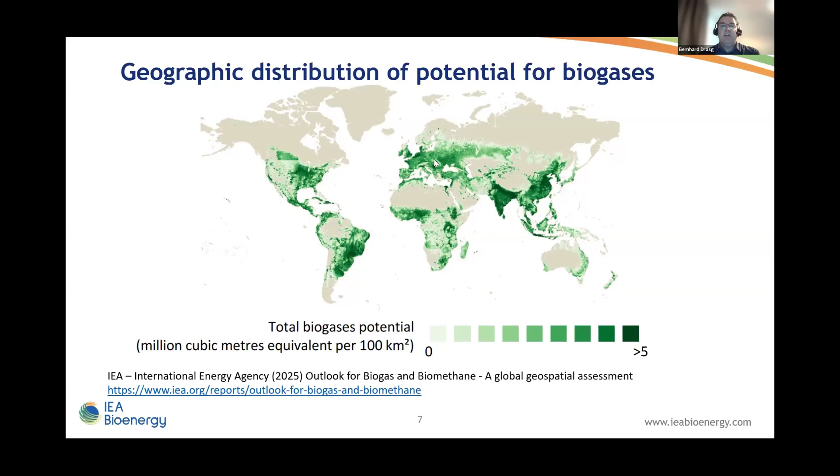I also would like to show a bit the geographical distribution of the biogas potential, also from the IEA report. You can see, for example, that in India or Southeast Asia there's a big potential, as well as South America, the US and Europe. So there are regions with a high potential of biogas.

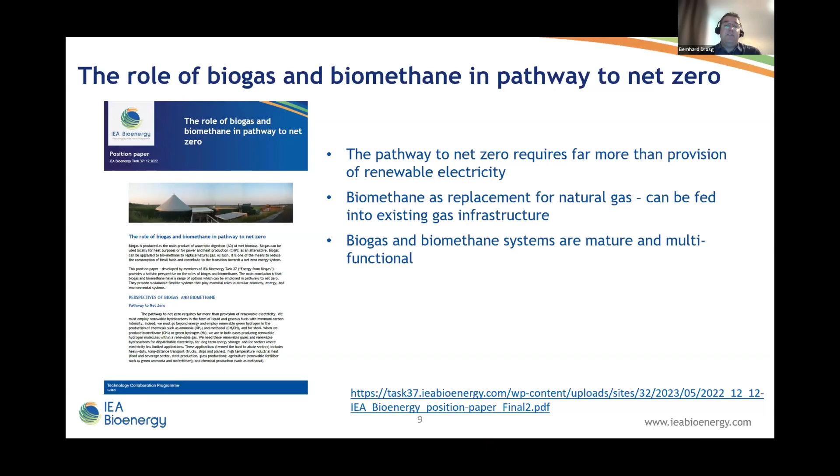We have published in the last 3 years a position paper called The Role of Biogas and Biomethane in Pathways to Net Zero, and I would like to highlight some main messages. It states that we require more than just renewable electricity, so bioenergy and biomethane will play a role if we want to reach net zero. Biomethane can replace natural gas. In my country, we have a strong gas infrastructure for fossil gas, and we can use this infrastructure for biomethane. Biogas and biomethane are mature and multifunctional technologies that can be deployed now.

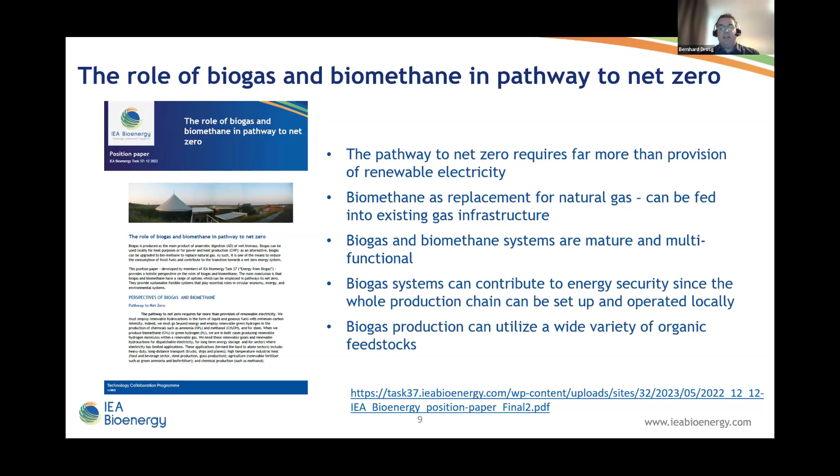We can also contribute with biogas systems to energy security, because often the whole production chain is operated and set up locally. Biogas can use a large variety of feedstocks, from manure to municipal solid waste to industrial byproducts, sludges, and so on. If we apply a biogas solution, we can reduce fugitive emissions from waste such as municipal solid waste or manure: the methane that would be emitted if manure is stored, we put in the biogas plant and reduce. We also have byproducts such as digestate and carbon dioxide, which are important to valorize. And with region-specific analysis of the availability, costs, and impact of specific feedstocks, we can ensure effective and sustainable biogas projects.

Biomethane is cheaper than green hydrogen and is also expected to remain so for some time in future. So definitely this is something worth to mention. And biogas and methane are sustainable and flexible systems that can be used in circular economy, energy, and environmental systems.

We just released one report, actually it's now for download since 2 weeks ago, about identifying and assessing sustainability effects associated with biogas solutions. You can find the citation. And the main message is that especially for planners, developers, and policymakers, it's important to understand the broad system effects of biogas solutions, and that they're together with waste management, energy and industry and agriculture. So it's a complex system. It's not like a monofunctional system.

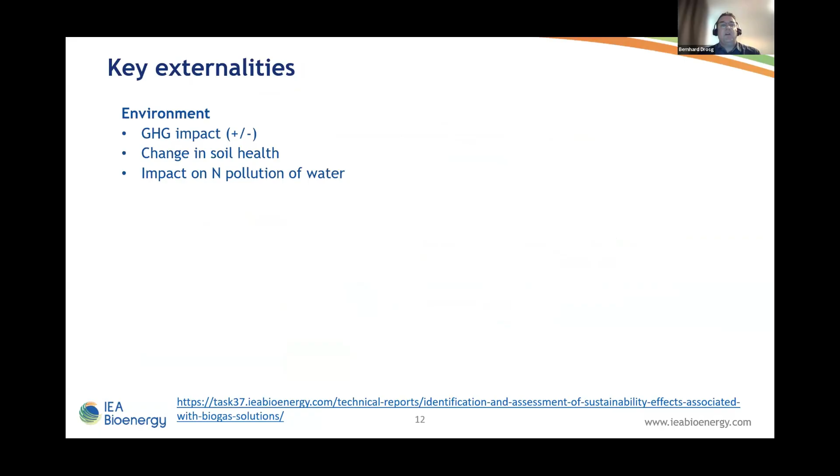Biogas can contribute to multiple sectors and sustainable goals, and it will require a great deal of cross-sectoral collaboration so that biogas can be more intensively deployed. I will just highlight some key externalities or co-benefits which are mentioned in the report. So biogas will have impact on greenhouse gas emissions, on soil health, and also on, for example, nitrogen pollution in water. It can have effect on economy and society.

So, for example, a topic of improving energy security, the cost of treating and processing wastes. We can use biogenic CO2. Often job creation in a rural area is something which is combined with biogas, and it can also contribute to resilience of agriculture. In agriculture, specifically to mention the reduction in use of synthetic fertilizer and also the impact of intermediate crops. With regard to energy, we can use existing gas infrastructure.

We can produce renewable energy, which is stable and storable, and we can contribute to energy transition and regional circular economies and eliminate fossil energy when we use the biogas instead of fossil gas. If you go to detail, there are like 53 sustainability effects highlighted in the report. You can look down in the link for the details.

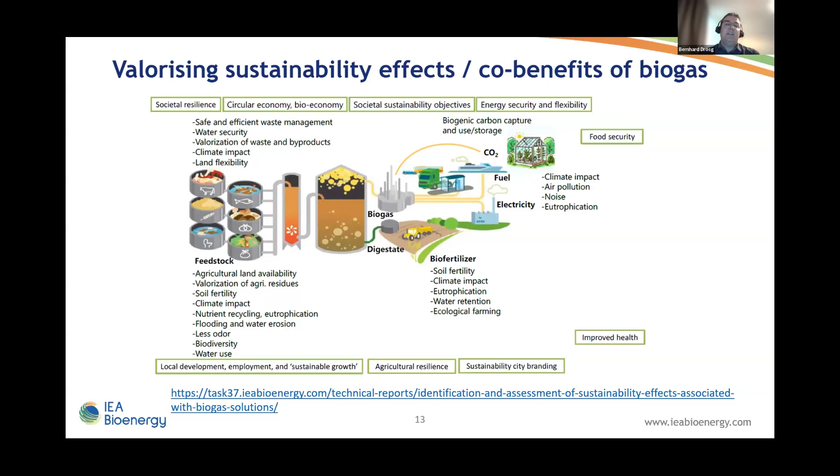So this is not something I want to go here in detail to show everything, but just maybe one interesting slide where you can see that for the biogas process, which is about feedstock, biogas, digestate, fertilizer, CO2, and energy, there is a broad range of effects and services to society which biogas can deal with. And there are also already intentions to see how we can monetize these effects so that the actors can also benefit economically from this. So yeah, don't want to go here into details. I have already given a summary, but just that you have seen also this overview.

So what can we do to promote? We can use scientific-based multi-criteria sustainability assessment. This is important, or we can recognize the cross-sectoral benefits of biogas solutions, which are in these different areas which are mentioned, from wastewater, agriculture, energy, and transport, and also in the industrial sectors. It is good to encourage a greater cross-sectoral collaboration. And also, if we think about policymakers and ministries, to have a shared decision-making and support that contribute to a circular economy in general.

And it should also have different sized solutions, and also valorize local communities. We should go more to integrated strategies that combine multiple renewable technologies to deliver desired functions while addressing urgent sustainability challenges. So this is something where biogas can play a role. And what else is to say? So it is important to harmonize the life cycle value chain perspective across relevant policies. So this is one message of the report.

And to enable biogas value chain actors to capture the full value of the contribution. As already mentioned, there are also some ideas how this sustainability effect can be monetized, and especially on the regulatory and administrative side, we should remove barriers and also restrictions on sustainable crop-based biogas and on long approval processes for technologies which are already mature.

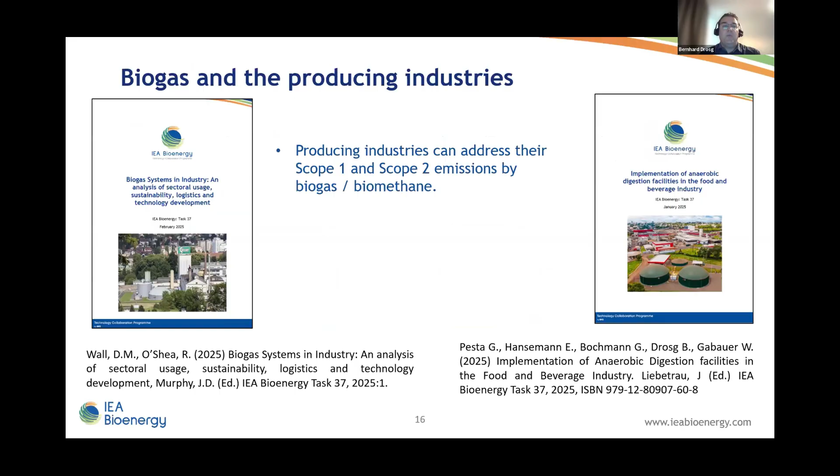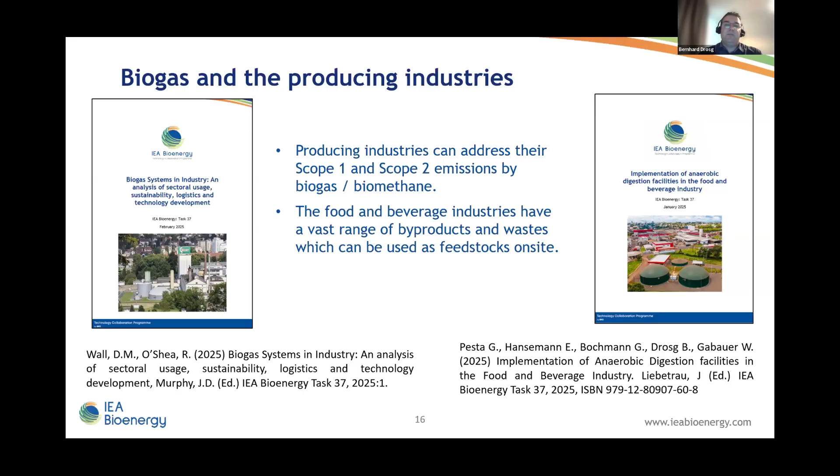And the second aspect is that especially food and beverage industries have a vast range of bioproducts, sludges, wastes, byproducts, and they can be used on site for biogas utilization. So then the logistics is also not so much the issue for the feedstock because it's already at the facilities.

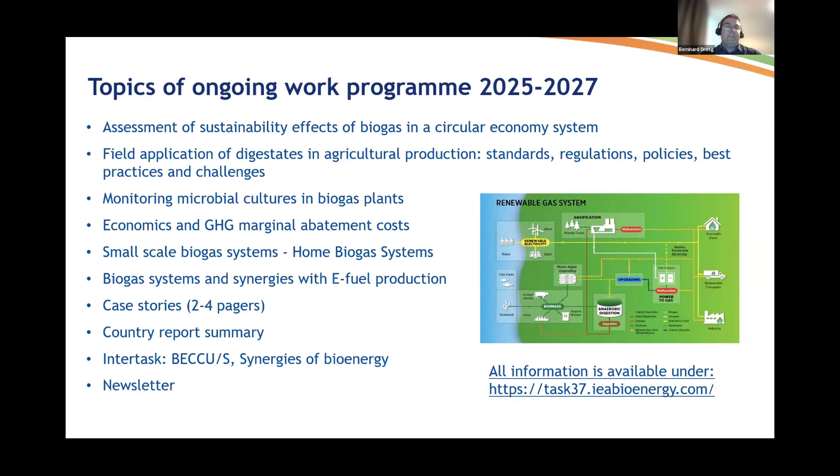So this was my presentation for today. I thank you for the attention.

Thank you, Mr. Drosg. It was definitely very insightful. I would also like to highlight that cross-sector collaboration, I agree, is extremely important. And sustainability assessments are another topic that GBA is also looking at. I would also like to bring to your attention a few biofuels marketplaces that have sprung up in India that we're aware of. Maybe you could also look at those. I'll avoid naming them, but there's a market coming up which could be looked at.

I would now like to invite Mr. Paul Greene, who is the principal of Greenetec LLC, a leading advisory firm in the renewable natural gas sector in the US. With over 30 years of experience in anaerobic digestion and biogas technologies, he's had key roles across EPC, across multiple companies. In 2010, he was one of the founding members of the American Biogas Council and served as its first elected chairman. Mr. Greene also holds a Bachelor of Science in Chemical Engineering. So, Mr. Greene, thank you for joining us. We're glad to have you. I will now leave the floor open to you.

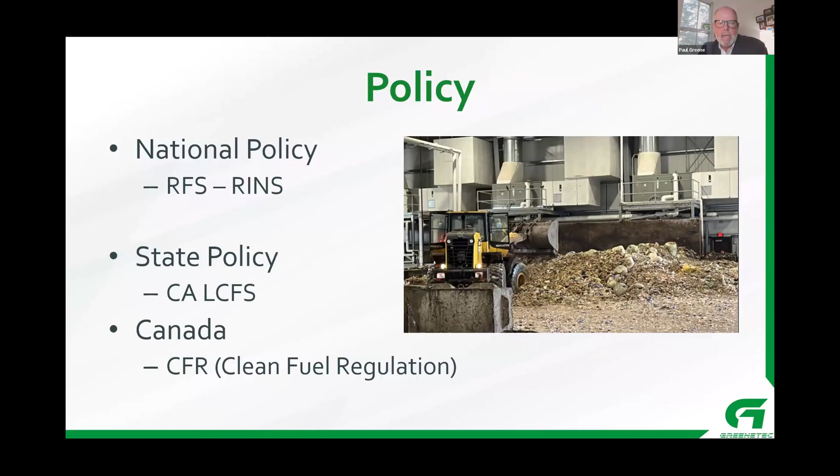Some policy in the United States ties to the RFS, the Renewable Fuel Standard. The currency of the RFS are RIN credits, RIN for Renewable Identification Numbers. In various states, California has a low carbon fuel standard that has been driving the US biogas market very passionately for the past five years, and the Canadian CFR.

As we speak, all eyes are on the upcoming 45Z production tax credit that is due to be put into law. The target is July 4th for the new budget, and we will know the rules for the 45Z production tax credit. Now we're building projects that have a 30% of project capital costs investment tax credit, which is fueling the industry currently.

Looking at new fuels such as aviation and maritime fuels is a very exciting opportunity in the United States. So back to the renewable fuel standard - there's several different types of these RIN credits. The most lucrative is called the D3 RIN for cellulosic biofuel.

You can earn about $33 per MMBTU for a D3 RIN credit, and you get those from dairy manures, landfill gas, and municipal sludge. D5 RINs, called advanced biofuel RINs, are trading at about $14 per MMBTU.

This big, beautiful bill, as our president likes to call it in the United States, is doing significant things in the biogas space. There's a hydrogen tax credit that is going to expire. Section 45Z is where the action is, and we're trying to figure out if negative CI scores will be allowed to incentivize that.

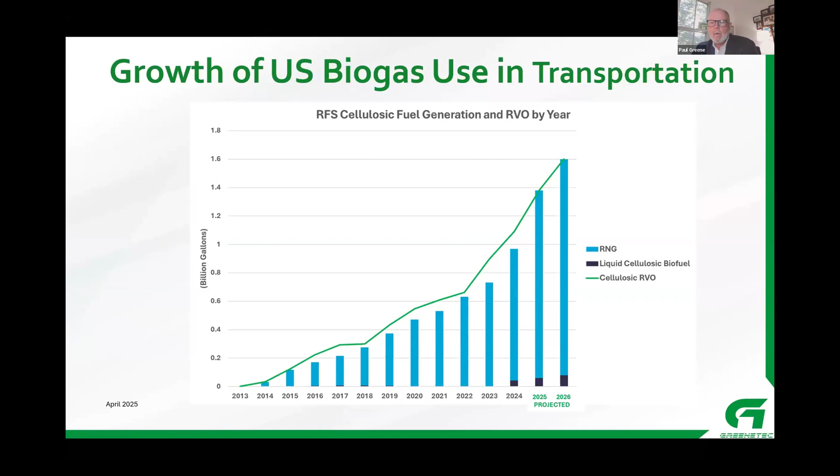This is a picture of the growth of US biogas use in transportation, and it shows of late the growth rate has been very robust, to the tune of about 1 billion to 1.6 billion gallons equivalent of transportation for the category of cellulosic fuels.

This shows the production of biogas from these projects. Landfills have most of the production. Agriculture has a large percentage of the production. Wastewater has a large piece of production, and food waste are the fourth largest.

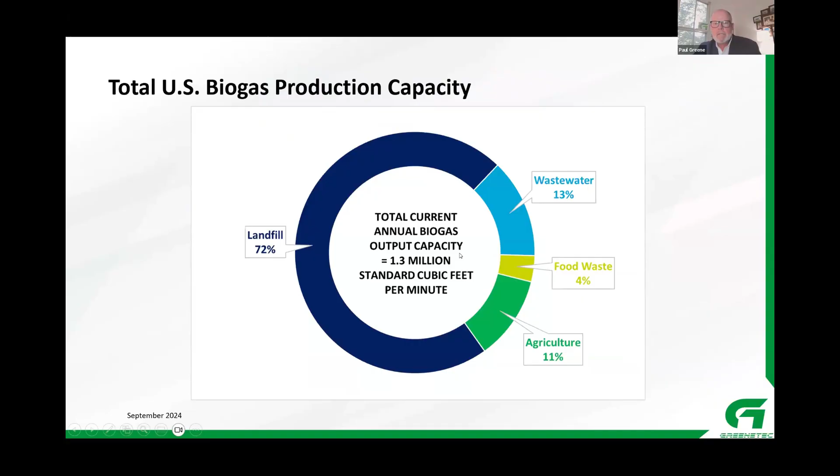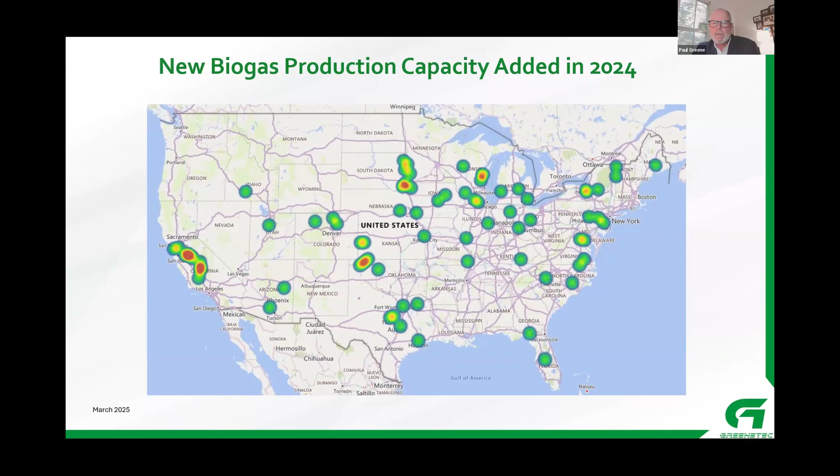In last year, this is where the new biogas production capacity was added in the United States.

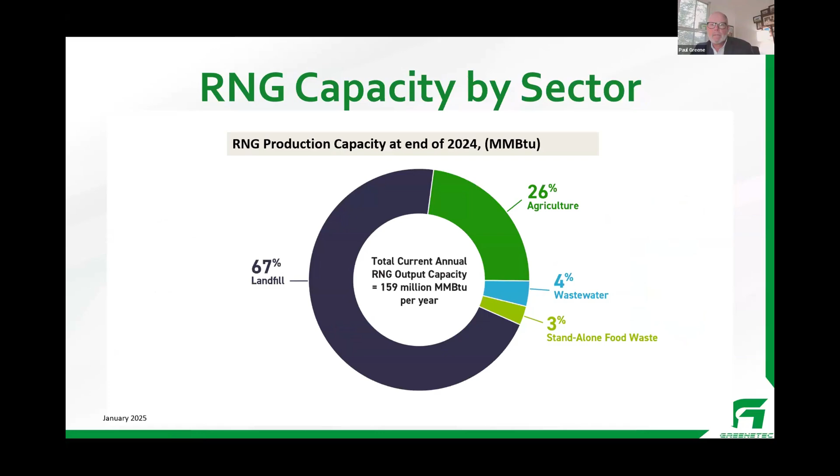More and more, we'll see crop residues being considered for feedstock. Things like wheat straw and corn stover are increasingly being considered.

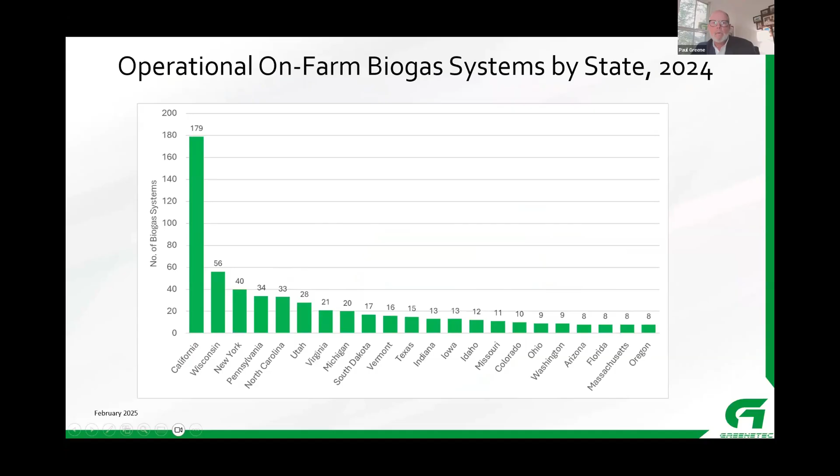This is the breakout by state of the different types of digesters. California is the leader. Wisconsin and New York and Pennsylvania follow. This is specifically for farm-based digesters.

The growth rate has been around 12 to 17% for farm-based projects in the United States. This is largely driven by the California Incentive Plan.

I'm going to fast forward here to some case studies to make up some time.

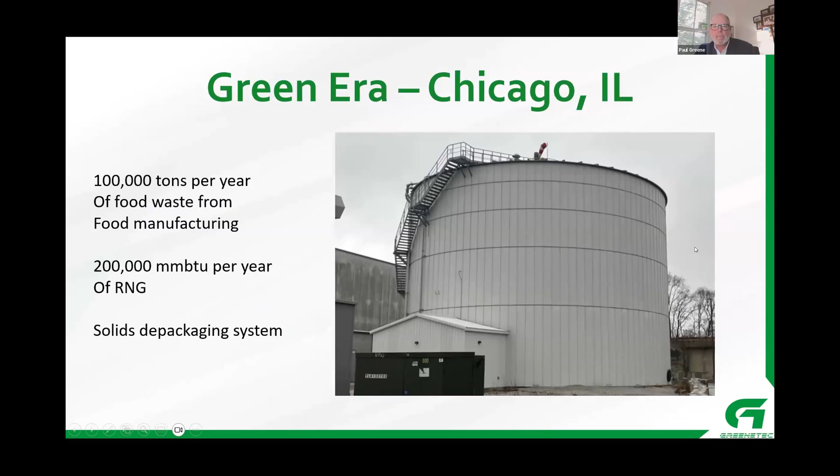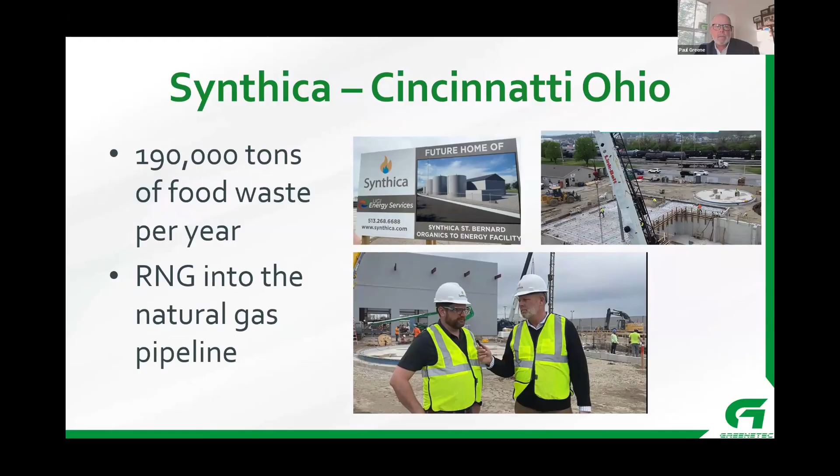In Ohio, in Cincinnati, this is a new food waste project that takes 190,000 tons of food waste and makes RNG for the pipeline.

In North Carolina, in the city of Warsaw, these are some food waste digesters that make RNG, about 45,000 cubic meters of digesters. This is a very large project, taking waste from processing of protein of hogs and chickens.

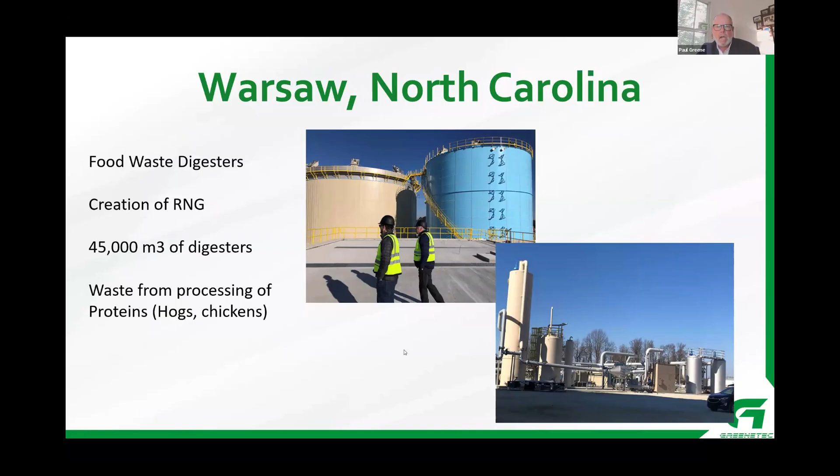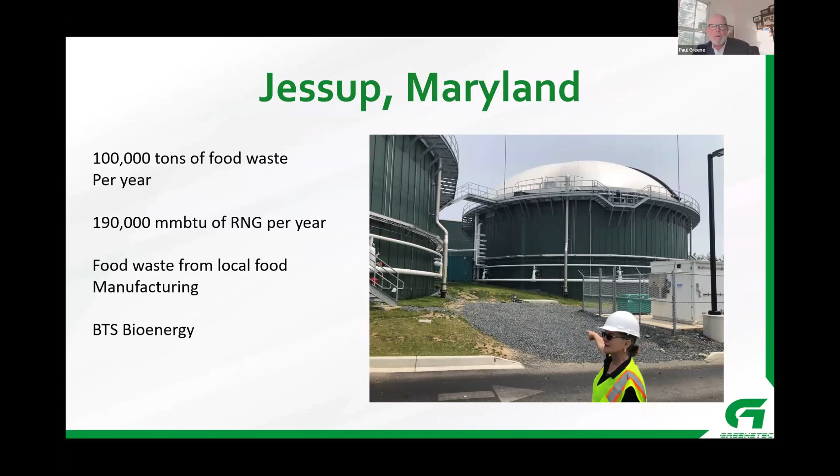In Maryland, in the city of Jessup, this is a food waste digester that processes 100,000 tons of food waste per year and makes 190,000 MMBTU of RNG per year, taking food waste from local manufacturing.

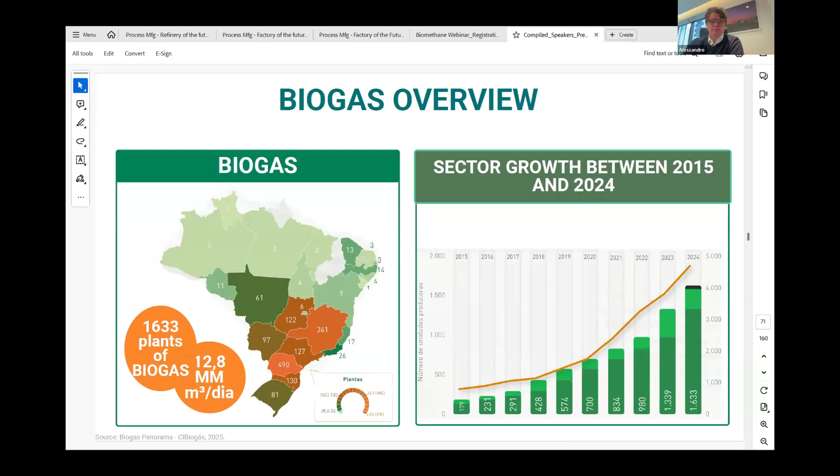So we have a big potential, especially in the sugarcane industry. Besides mud, that was said before, also bagasse and leaves, and of course urban solid waste, sewage, and animal protein is also important. So we see as a vision 35 million cubic meters per day in the next 5 to 6 years could be something achievable. The long-term theoretical potential for Brazil is 120 million cubic meters per day. So a huge potential. Half of this is sugarcane. So this has to be seen how it's going to be developed.

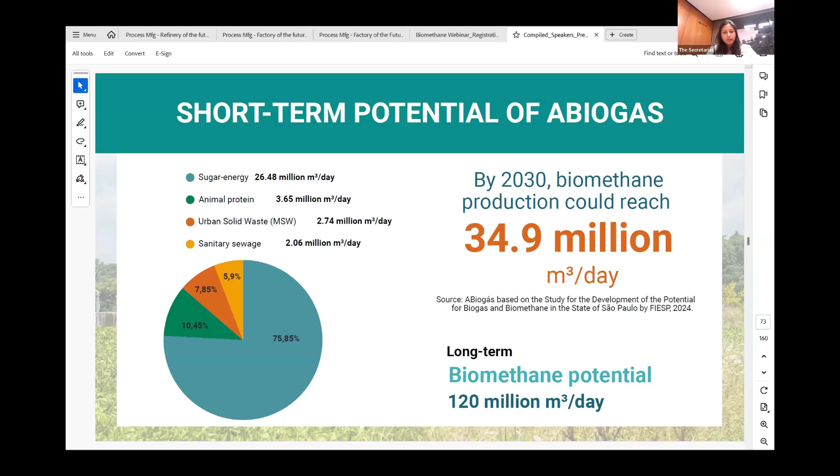So all this potential is only based on waste. We don't have energy crops considered here, especially sugarcane industry, agriculture, and animal. So this is more or less what we're planning to do. And we have a lot of projects going on now, especially for transport, trucking, based on biomethane. There's a big landfill project called Gas Verde in Rio that is mainly for biomethane used in fleets and also heavy and light vehicles. Please.

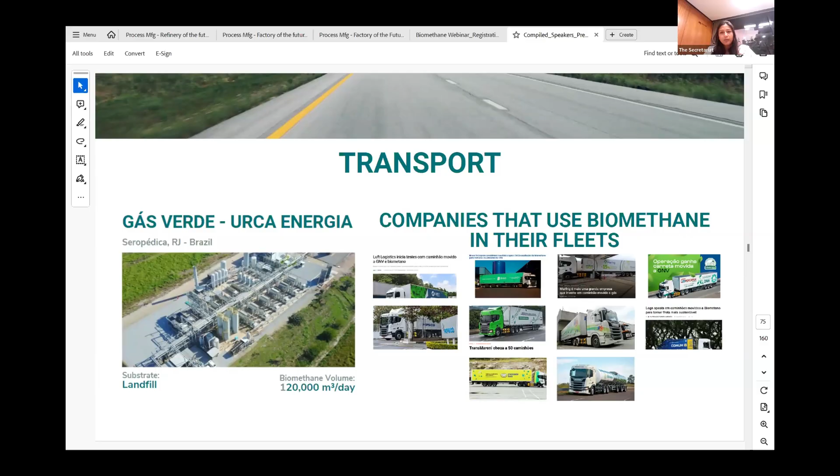And a lot of regulatory framework in place, especially a lot of different policies being set up, especially the Fuels of the Future law. If you can go to the next slide, please, we can talk a little bit more on that. Fuels of the Future was passed last year. So it's for decarbonizing the natural gas industry. One more slide, please.

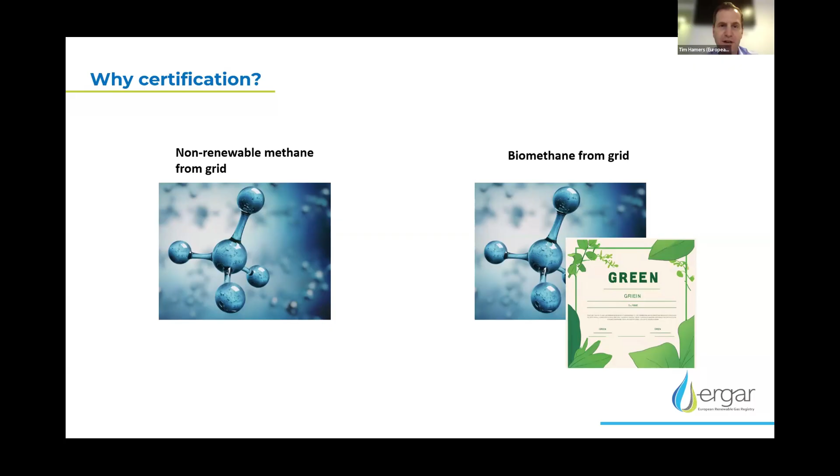And I will speak today about biomethane certification. That's our core expertise. And then the main question is, why do we need certification? It's all about the difference between non-renewable methane from the grid and biomethane from the grid, because the molecule is the same, especially if it's mixed. The main difference is the certificates you have with it to claim that you use biomethane. And in Europe, we are a bit in the unfortunate situation that we have several certificates. Doesn't make it easier. I will briefly present them.

So first we have the guarantee of origin. I think it's a term that was used in the previous presentations as well. It's a book and claim certificate that's issued by a national registry, and then it's in this national database. And as said, when you want to send from one registry to another, that's done by us. And the main purpose is consumer disclosure. So that means just to show to the final user that you can claim to use renewable gas, or biomethane in this case. And the most important one indeed is book and claim. So the certificate is traded separately from the physical gas itself.

A second certificate based on EU legislation is the so-called proof of sustainability, or PoS. And the main purpose here is to show that biomethane is compliant with the sustainability requirements under the Renewable Energy Directive. So biomethane can have both a GO and a proof of sustainability.

And proof of sustainability can only be given to biomethane that is sustainable, where the guarantee of origin is given to all biomethane or practically all biomethane. The purpose is a bit different because there are a lot of targets at EU level, but also at national level. For example, in the transport sector, if you want to use biomethane to reach these targets, you need to have a proof of sustainability.

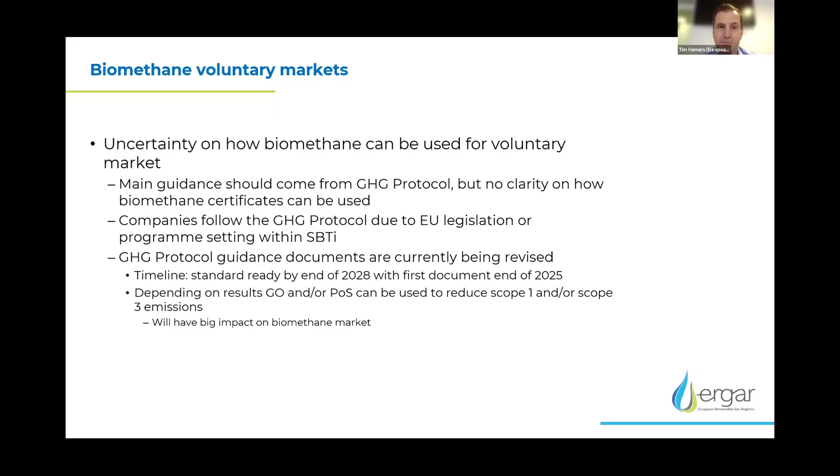So the first document is expected by the end of 2025, and the final standard should be ready by 2028. And hopefully then we have more clarity how the biomethane can be used, and also more corporates will invest in biomethane to decarbonize, and it will have a big impact on the markets.

Short update on the support mechanisms. They really depend per country, often also a bit on the level of development, where you can see that in the beginning, there's a lot of investment support, so support to really build the biomethane plants. Then it often moves more to production support, so contracts for differences, for example, where you get a certain price for your biomethane. And then kind of the final phase, roughly speaking, is quotas. So in Germany, you have a lot of quotas, but for example, also in the Netherlands, you have the blending obligation.

And that's the support mechanisms that are possible, and that also impacts the price. So in each market, there are small differences in the approach. So everything combined makes the biomethane price in Europe. But then looking at the price, what makes the difference between biomethane? Because it's not that biomethane has one price. It's a very differentiated market and a fragmented market in contrast to, for example, natural gas.

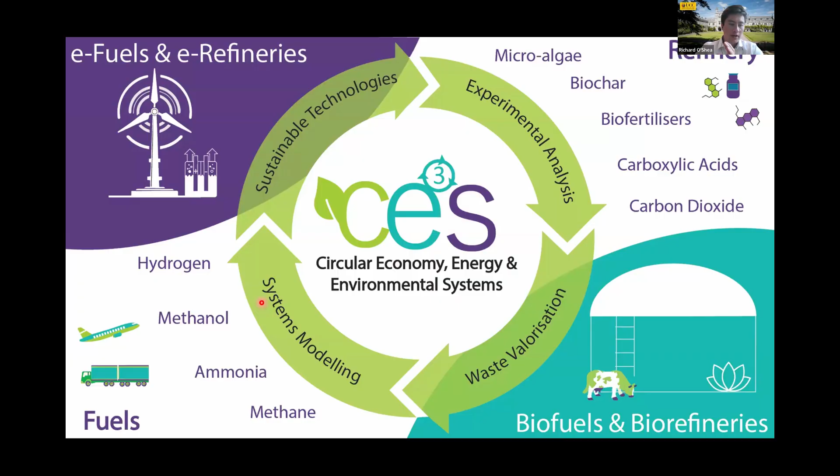And expanding that out slightly further, this graphic shows the different areas in which our research is focusing on. We have traditionally done a lot of work in anaerobic digestion in the bottom right-hand corner, but in recent years we've expanded beyond that and we're looking at electrolysis, biological methanation, and novel methods for upgrading of biogas to biomethane that Dr. Bose will speak about, as well as looking at valorizing digestate through the production of biochar and using those in downstream processes.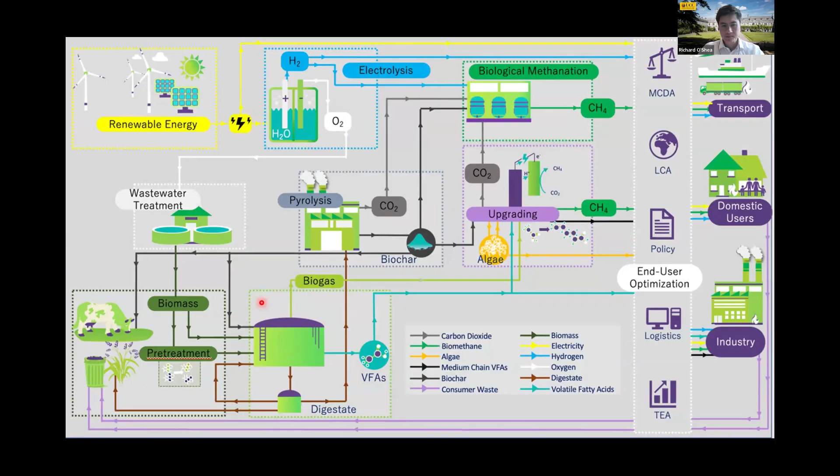In terms of some key highlights and novel developments from recent research projects, one of the projects that we completed was called the EcoAD project, funded by the Sustainable Energy Authority of Ireland and Gas Networks Ireland. It had 5 work packages that aimed to enhance the on-farm digestion efficiency through novel pretreatment of biomass used in Ireland, integrating electromethanogenesis with anaerobic digestion to improve overall performance, optimizing the logistics of on-farm anaerobic digestion, and a techno-economic analysis.

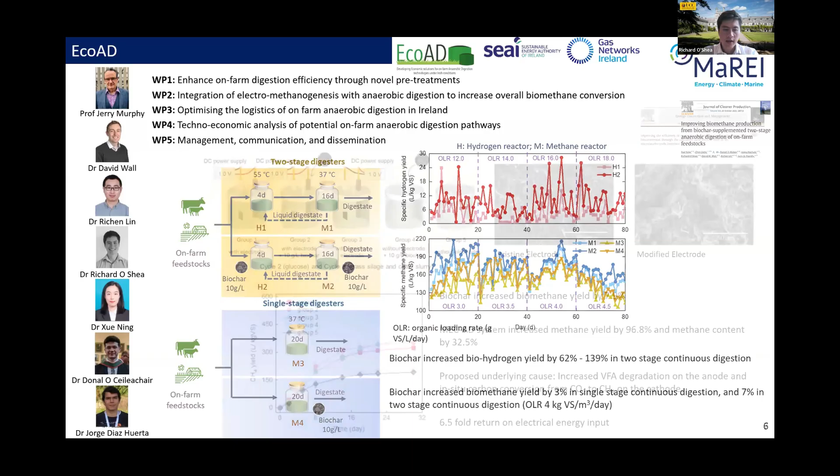One of the key findings from this work was comparing 2-stage anaerobic digestion with and without the addition of biochar. And what we found was that the addition of biochar increased hydrogen production in the first stage by anywhere between 62 and 139% in 2-stage digestion. And when we looked at methane yield, adding biochar at approximately 10 grams per litre increased biomethane yield by 3% in the single-stage system at the bottom, or by 7% in the 2-stage system at the top when it was operating at an organic loading rate of 4 kilograms VS per metre cube per day. Moving on from that, we also investigated the impact of adding electrodes into the digesters. So we had 5 different groups.

The first group had a digester with just 2 electrodes. The second group had a digester with electrodes and 10 grams of biochar. The third group had a digester with electrodes and modified surfaces. The fourth group had a batch digester without electrodes and 10 grams of biochar, with a control in group 5.

What we found was that in these batch trials, biochar increased biomethane yield by 7.9%. The MECAD system, incorporating the electrodes, increased methane yield by 96% and improved methane content by 32% compared to the baseline scenario.

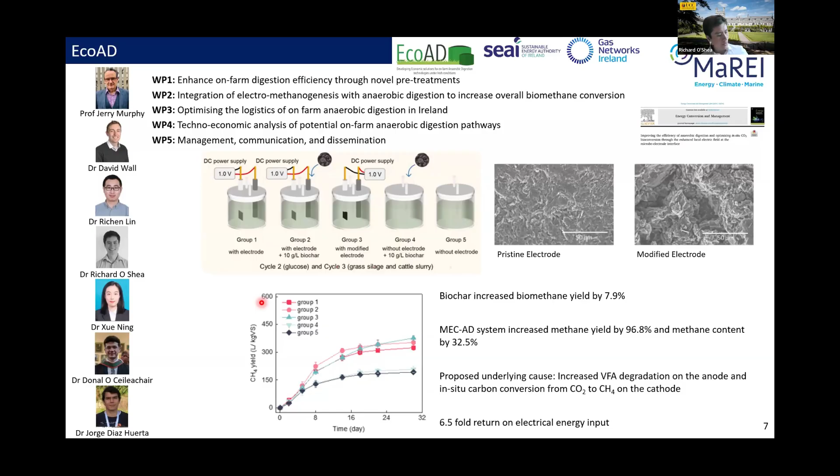The proposed underlying cause was increased VFA degradation at the anode and in situ carbon conversion from CO2 to methane at the cathode, a kind of in situ Sabatier process. We found that if you put in 1 kilowatt hour of electricity, you could increase the methane output of the system by approximately 6.5 times. So it was acting as an enhanced way of degrading the feedstocks.

We also looked at the logistics of implementing on-farm anaerobic digestion in Ireland. Ireland is a very disparate agricultural industry, with a lot of small farms disaggregated throughout the countryside. We also looked at the impact of our farming system on the availability of feedstock for digesters. In Ireland, our pasture-based system means that livestock are out during the summertime, only indoors for a portion of the year, making that manure resource difficult to obtain during summer months.

We also looked at the impact of different demand profiles. Because of our agricultural system in Ireland, milk processing is a large demand, and that peak demand would be in the summertime. Traditionally, gas network demand would be highest in the wintertime for heating loads.

Moving on from that, we also looked at novel 2-phase anaerobic digestion systems, where we tried to control biogas output in order to meet peak electricity demand. This is a 2-stage, 2-phase system designed and built by Rajas Shinde, which uses a series of leach bed reactors and upflow anaerobic sludge blankets.

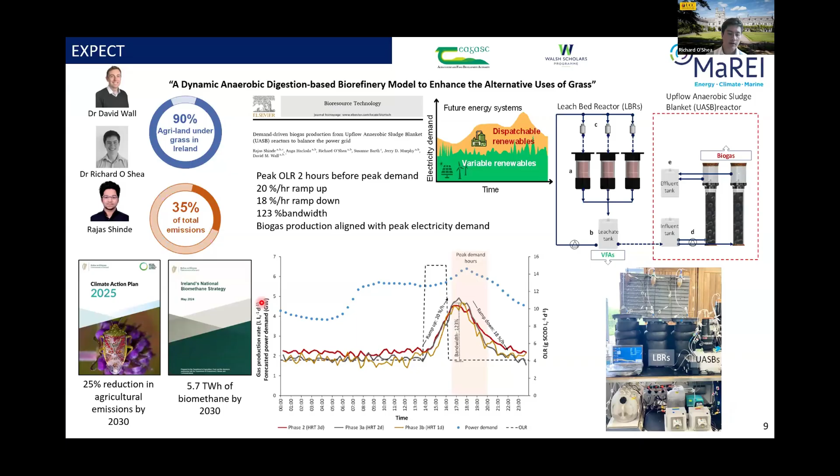What we found was that by pulse feeding the EGSBs or UASBs, with a peak feeding 2 hours before the expected electricity peak in the evening, you could control biogas output to match periods when electricity demand would be highest, allowing industries to reduce their electricity consumption from the grid by generating electricity at times of peak demand.

This work was also assessed looking specifically at whiskey distilleries by Dr. Anga Hackula, who's now at the University of Maryland in the US. His research looked at a similar 2-phase system, but this one utilized whiskey byproducts, both solid and liquid.

What he found was that the two-phase system obtained about 60% of the theoretical biogas production. The methane was about 75% by volume. When he looked at the VFA profile of the leachate produced from the LBR system, it was approximately 55% butyric acid and 20% acetic acid.

He then looked at a number of different systems: a single-stage digester using whiskey byproducts, a two-stage digester, and this novel leach bed upflow anaerobic sludge blanket reactor. All three systems obtained similar methane yields, but he also found that the biogas produced was able to replace about 44% of the natural gas demand of the distillery, increasing the revenue generated per original litre of alcohol by approximately 0.14 euro.

Some of my own research looked at how to implement anaerobic digesters at distilleries in order to reduce their Scope 1, Scope 2, and Scope 3 greenhouse gas emissions. We assessed the byproducts from a large distillery in Ireland in a number of different scenarios, then modelled what would happen across 9,261 different scenarios in terms of maximising benefit, minimising drawback, treating drawbacks and benefits equally.

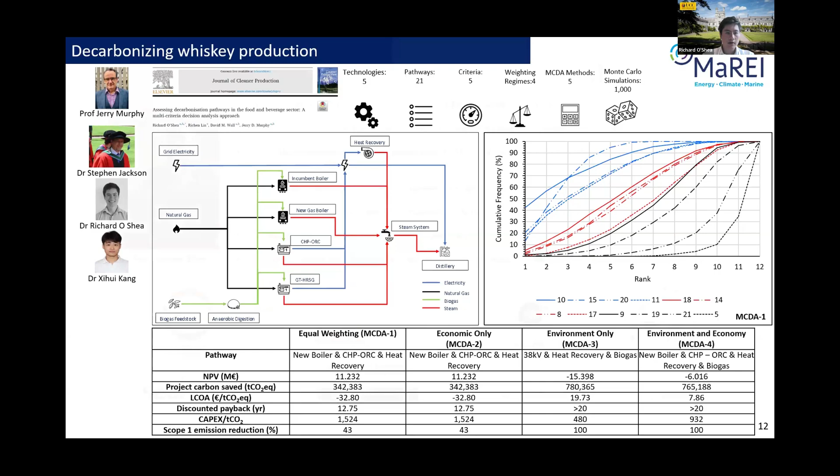Archishman Bose. Thank you, Richie, Dr. O'Shea. And so if it's okay, I'll ask you to go forward with the slides, if that's okay. Yeah, no, I'll so if you go back, I'll just give you an introduction.

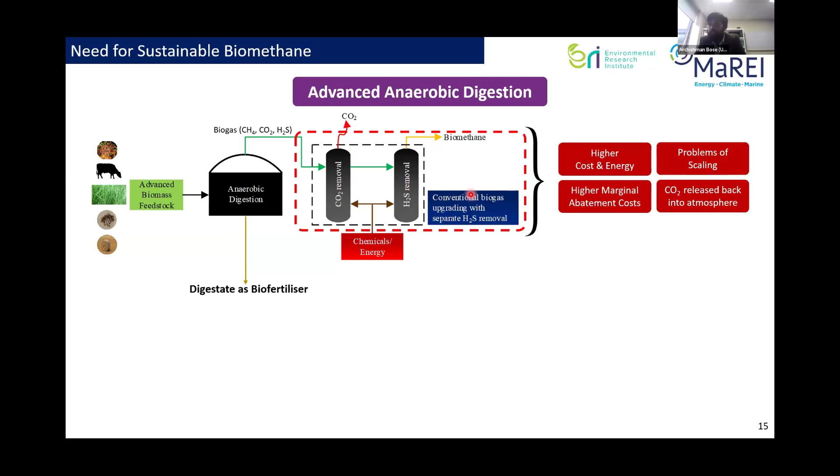Conventional biogas upgrading, such as water scrubbing, amine scrubbing, or pressure swing adsorption, are costly. They have problems of scaling. The marginal abatement costs become very high because they are costly, using lots of chemicals and energy. And then in many cases, the CO2 is released back into the atmosphere, so the sustainability is reduced.

Then we talk about digestate as a biofertilizer. However, that fertilizer has lots of nitrates, nitrogen and phosphorus in it. So if we land spread it without any regulations, it will lead to problems such as nitrous oxide emissions and eutrophication. This is a big challenge in Ireland and within the EU.

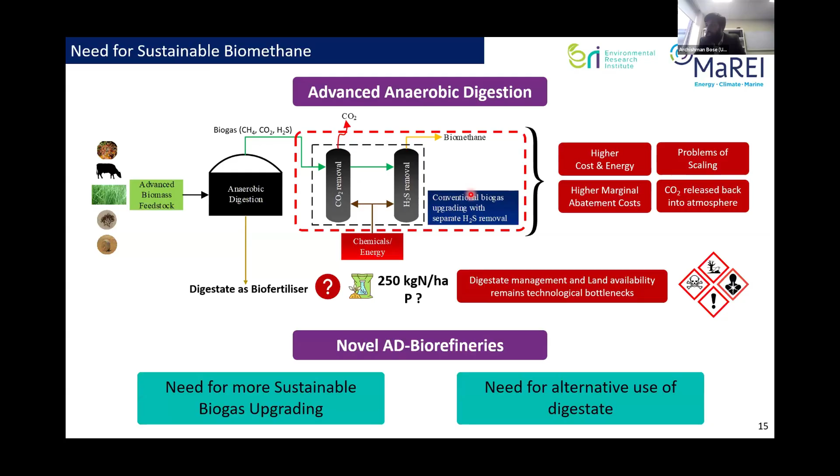So what we are focusing on in our research group is alternatives for biogas upgrading, so more sustainable biogas upgrading, and alternatives for digestate management besides land spreading. I'll take you into a couple of technologies we have been looking at for each of the two.

The first one is photosynthetic biogas upgrading. This is something I did my PhD on, and now we are currently leading a research project on it. Instead of doing physicochemical separation of carbon dioxide, we are using a carbonate bicarbonate cycle, enabled by microalgae, to produce an AD biorefinery where the carbon dioxide in biogas is utilized by microalgae to produce high value products, either by itself or in a biorefinery, and then the biogas is upgraded to biomethane.

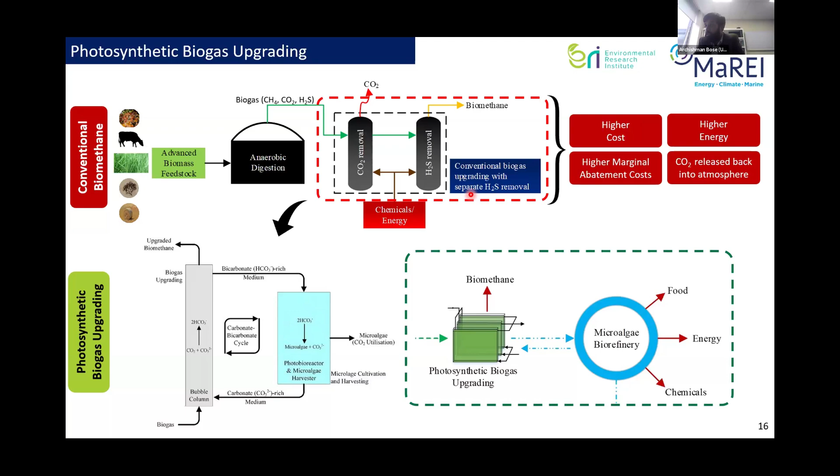So in the next slide, you can see the carbon dioxide is bubbled in a bubble column, a very well-known technology. Because this is a highly alkaline environment, pH over 9, the carbon dioxide gets absorbed as bicarbonates. The sulfur H2S is also removed, and then the microalgae in the presence of light can take up bicarbonate. Not all species can take it, there are only a few species which can use bicarbonate as their preferable carbon source, so we have to do some species screening. Once it takes up the bicarbonate, it raises the pH back, the bicarbonate is converted back into carbonate, and the cycle continues. So we call it a carbonate bicarbonate cycle.

And we have published significantly on this technology over the last 6 years, both on optimizing the bubble column, finding the correct species, and writing up on how we can see the whole picture in terms of biorefinery systems when this is integrated with anaerobic digestion.

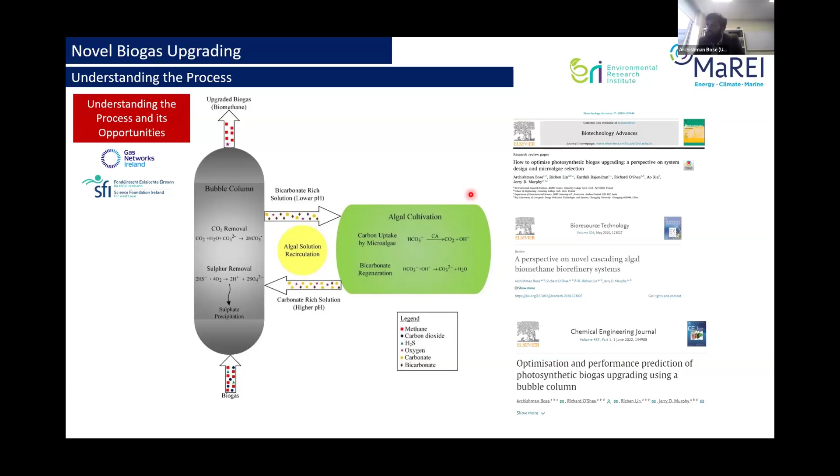So in the next slide, you will see an initial feasibility assessment we performed where we produced biomethane via photosynthetic biogas upgrading. The microalgae was spirulina, which is a high value food, and the biofertilizer was digestate. We did a detailed economic and environmental assessment, and found that with economic allocation, the biomethane can be produced at less than 10 grams of carbon dioxide per megajoule, which is around 90% emission reductions compared to natural gas emissions in transport. The marginal abatement cost was negative for a 3 megawatt plant. It becomes positive for smaller scale systems, but it's still lower than the carbon dioxide price.

By this, we have shown that if this could be applied and we can sell microalgae for human food, we can produce biomethane at 3 cents a kilowatt hour, which was the price before the war in Ukraine broke out. So without any subsidies, we could run very cheap, we could produce very cheap biomethane. This is primarily because the spirulina is actually giving the bulk of the revenue, it's a very high value product.

So based on that, we did further work, but that was not the end of the technology development. We had 4 key questions, and that has led us to the CABI project, which is developing cascading biomethane, biochemicals, and biofertilizer systems for a circular bioeconomy in Ireland.

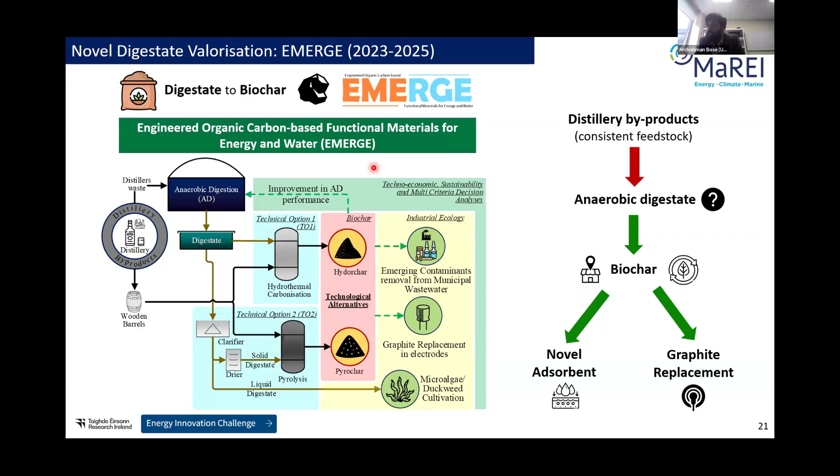So in the next slide, I will talk a little about what we are doing with our digestate. This is the Emerge project, which is coming to an end in 5 days' time. In this project, we are taking the digestate and either pyrolyzing it, so drying it and then pyrolyzing it, or using hydrothermal carbonization to produce hydrochar. These 2 forms of biochar we are looking at using as a novel adsorbent to remove emerging contaminants like PFAS, dyes, or antibiotics, or we are looking to replace graphite, because graphite is a critical raw material, and biochar or biocarbon, when engineered, can replace graphite as a highly conductive material.

This is a project we had been doing, with Dr. Xue Ning and Dr. Deepa Sachan as the postdoctoral researchers, and we had been producing lots of different biochar. We found that biochar produced at 700 degrees and 90 minutes was the best. However, in terms of surface area and conductivity, the biochar showed extremely large variations.

So we did a lot of treatment, and we have ended up doing acid treatment with different acids, and we have consistently produced biochar with surface area almost 400 meters square per gram. And we can also see that,

Richie, if you could minimize your, yeah, perfect, thanks, sorry.

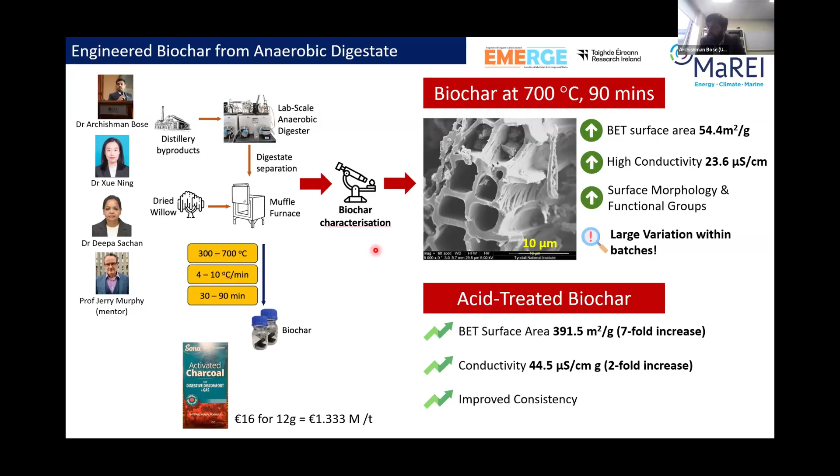So you can also see that biochar is being used for very high applications. For example, here you can see at the bottom that it is used for digestion, and it's sold for 16 euros per 12 grams, which comes to 1.33 million euros per ton, which shows the potential for biochar. Next slide, please.

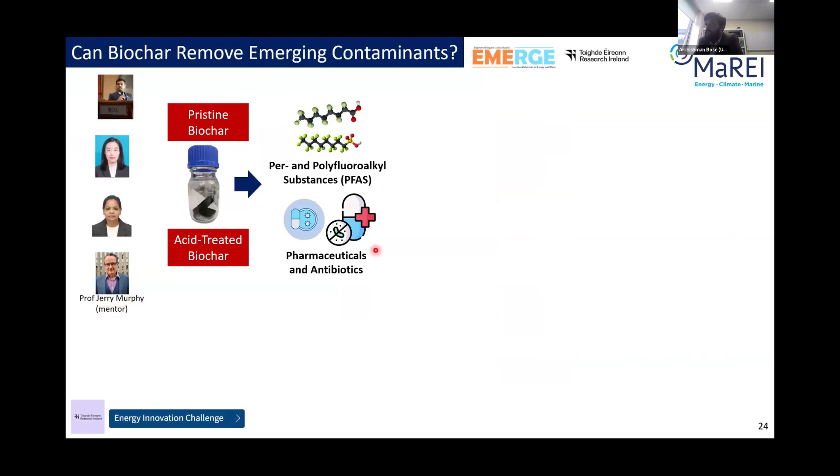So this is what we have been doing. We have been taking the pristine biochar, engineering that, and looking at design of experiments to remove a suite of different emerging contaminants. And we have got very good initial results when we looked at removing ibuprofen from wastewater, or removing copper and lead, which are problem heavy metals in Ireland especially. So in the next slide,

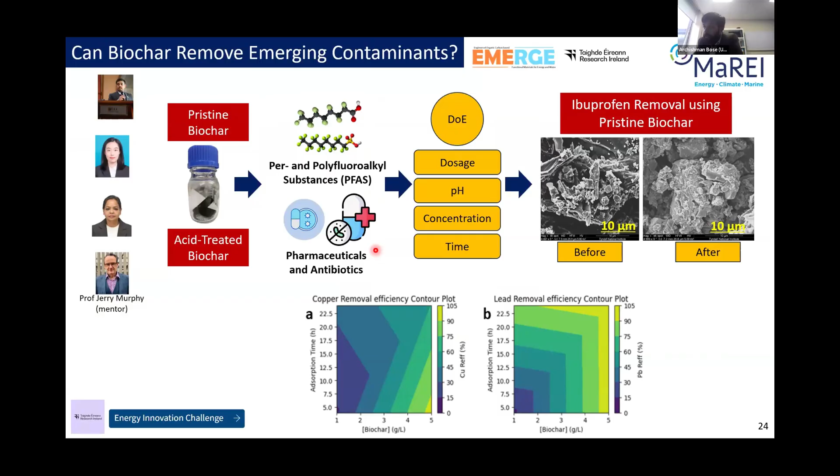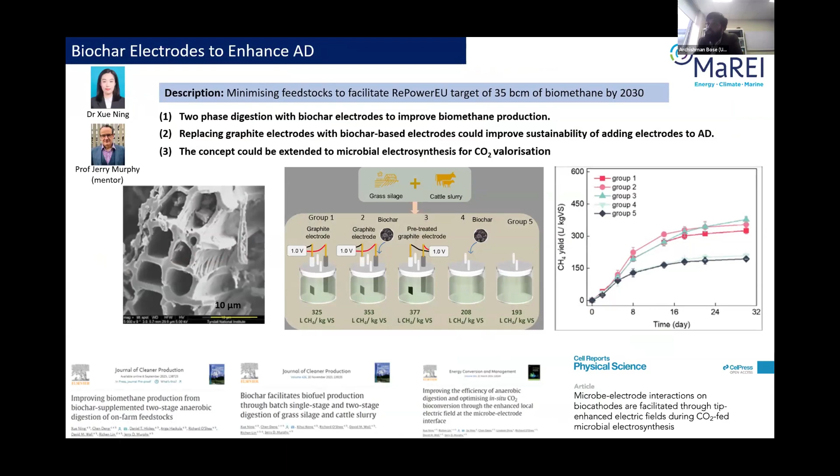this is taking forward the work that Dr. O'Shea mentioned previously on adding biochar that Dr. Ning did in a thesis, but here we are replacing the graphite electrode with a biochar-coated electrode. We have not presented any result here because it's currently in preparation, but we have got significant beneficial results. So instead of graphite electrodes, which is a critical raw material, we can now 3D print bioelectrodes made of biochar from digestate and improve the biogas production in anaerobic digestion. So a great step forward in circularity and sustainability.

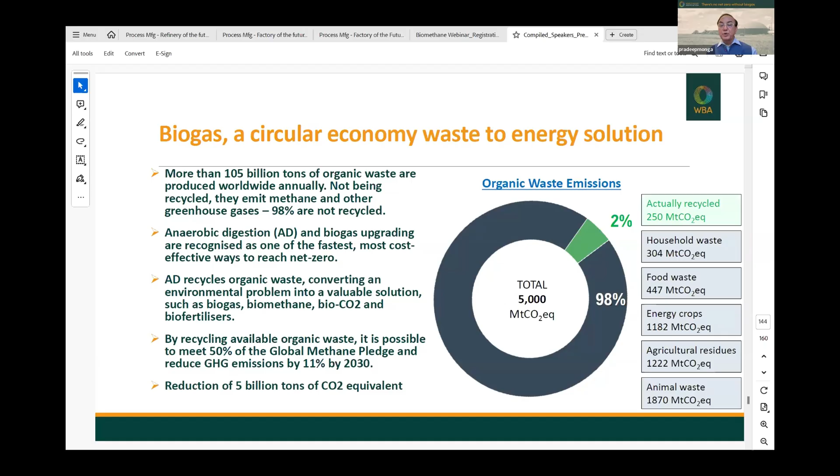By recycling all available organic waste, it is possible to meet 50% of the global methane pledge and reduce GHG emissions by 11%. Other colleagues already mentioned. And it can be almost 5 billion tons of carbon dioxide equivalent. And you can see on my right side how all the waste is really there, which is not utilized at all as of now. Next, please.

We are talking about global market trends. We are talking about 40 billion cubic meters of natural gas equivalent of biogas being produced, primarily for electricity and heat. Bernard already mentioned that in their report. Basically, biogas to biomethane for the transport sector is where the trends are coming very fast, to decarbonize the transport sector and also the national grid. 10 billion cubic meters of biomethane is produced globally, which is almost 0.2% of natural gas demand.

But there is a challenge now how we look at biogas, biomethane, and bio-CO2 also as raw material producing e-methanol, bio-LPG, and renewable dimethyl ether, the rDME molecule we talk about. There's a future market when we talk about physical molecules. Next, please.

We are talking about investment in the global biogas market. We look at the trends and we find that currently, the investments are hovering between $2 to $3 billion per year, but it is moving so fast, 8 to 10% growth is expected, and it will reach almost $15 billion annually by 2050. But we feel that the market will really become mature by 2030, 2035, like other renewables. Demand for biomethane will double.

When we look at between 2023 and 2035, emissions-intensive industries, we feel, are turning to biogas and biomethane as captive energy alternatives. And government and industry are developing very good public-private partnership models, collection hubs and digital platforms for logistics so far as feedstock is concerned, but also when we talk about FOM or biodigestate. Next, please.